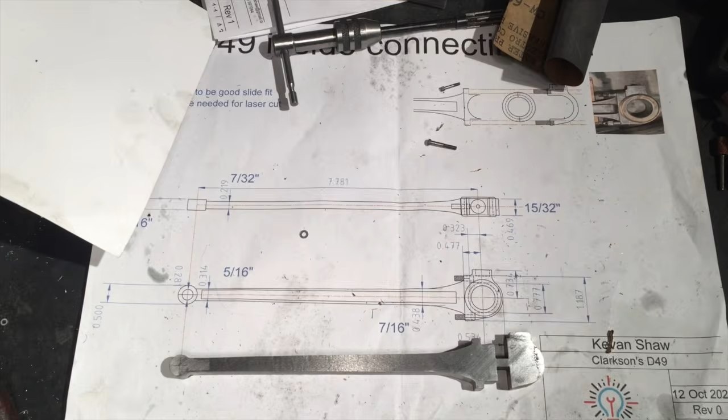Right, so clean this thing up on the belt linisher and with the Dremel to get rid of all the laser marks.

It's come up a lot easier than the other rods did. So yeah.

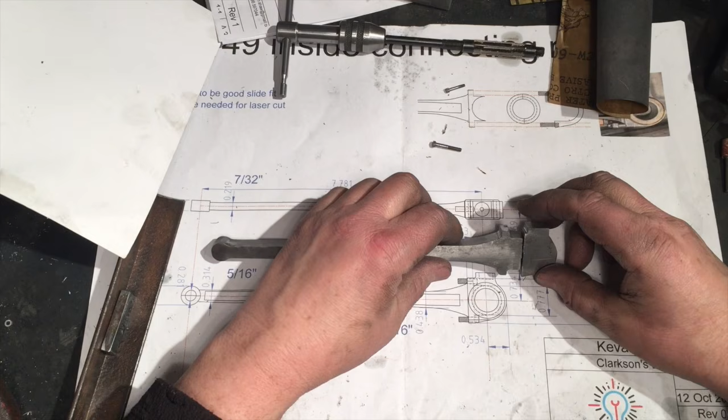Next job is to cut these two pieces apart and start to mark this up so I can plug that back onto there. Now we have some tactical challenges for how we're going to work on this. I think the first job will be to square this thing up, cut these so they're clean and square both ways, and then face that.

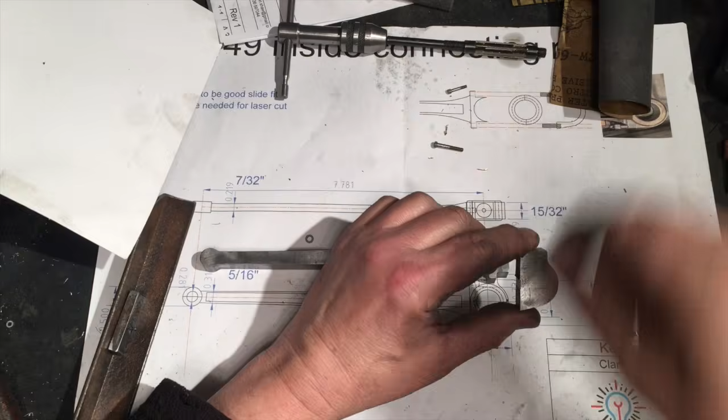And once we've got there, we can start to mark up how we need to cut this. Again, we're going to have to be holding it that way up and cutting that way, in order to get the slot to fit here.

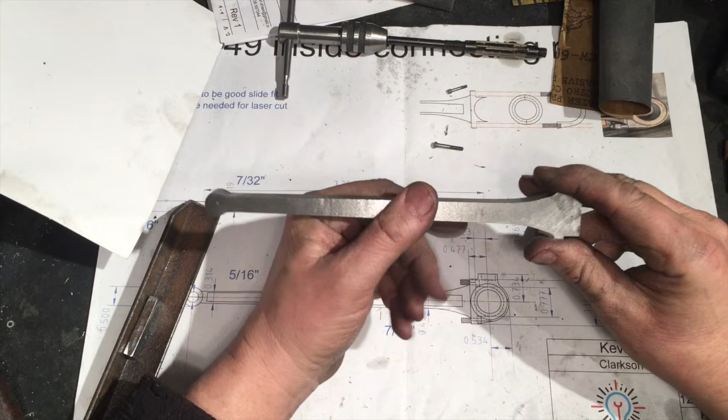So I think we're going to have a lot of alignment challenges here. To cut this one in the vise means clamping on those two sides, and that means you don't have a reference in that plane really, because that's a sloping surface.

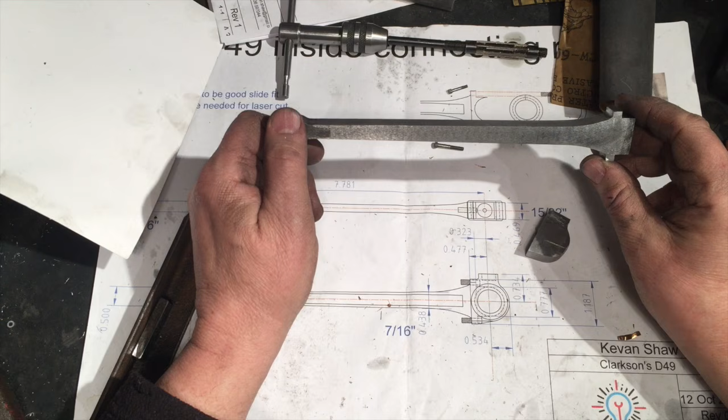I think it's necessary to mark this up and mark the center line, and as we did with the other rods, use the center line and visually line that up on the vise, because there's no physical option there to do that. So lay this over the drawing and see how close we are.

Pretty close. Those curves should match exactly. They don't quite here due to laser cutting and a bit of fettling. There's quite a lot of fettling there. I think I might work that curve a little bit better because it's got a little bit of a lump in it. Yeah, you can just see there.

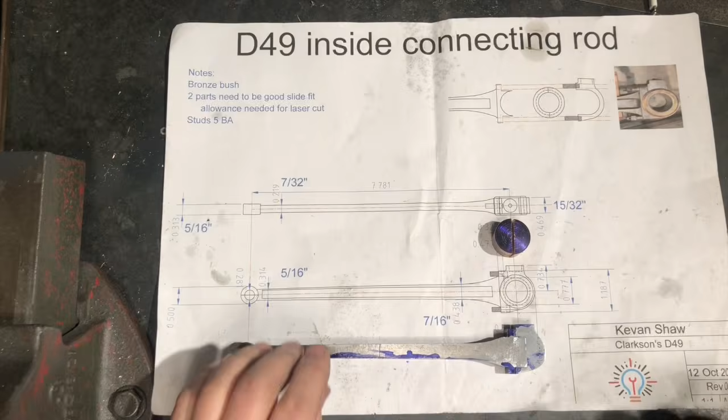Dremel time again. Well, I've done some work on this conrod. I've made these two pieces fit together. I like that.

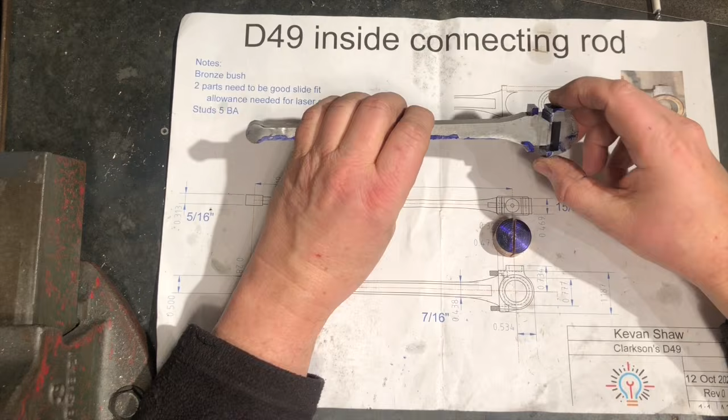That was done on the mill, and it was done by essentially matching the two parts up as much as measuring. Basically, I kept taking small cuts and then checking them for fit, and they are pretty close fit just now.

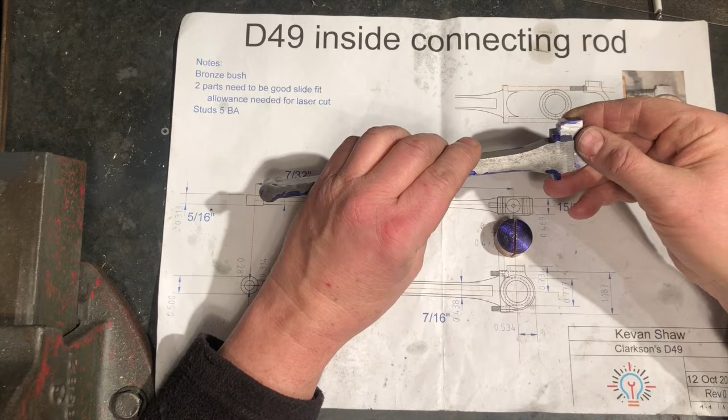There we go. So the next challenge we have is fixing these bits together. So I've marked up centers for drilling.

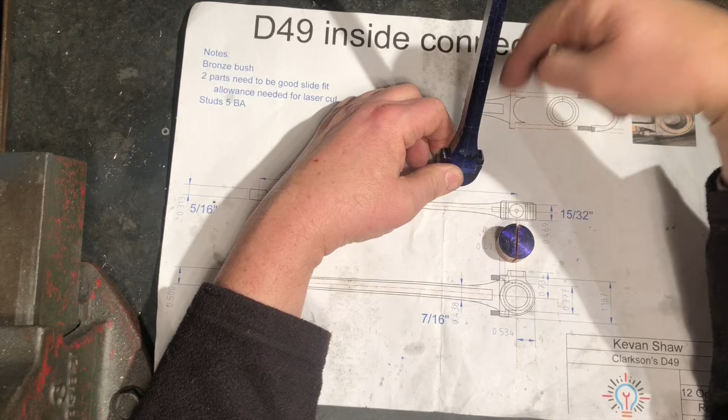Drilling in this way isn't practical. We haven't got anything that's going to get past here. So what I'm going to have to do is set this up that way up. I've drilled down from the top into this bit, and once that's done, use that to mark out the faces on this, put that in the vise and drill that downwards and tap it.

You could ask quite why I'm doing all this, because this part is buried deep inside the engine, and once it's in and the boiler is on, it's never going to be seen again. But I just like the idea of doing it correctly.

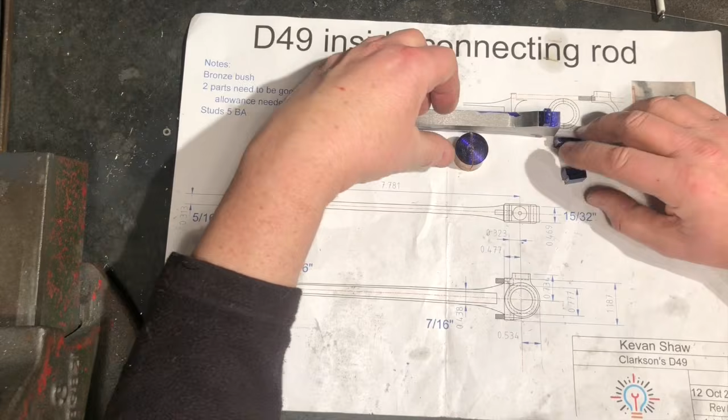I mean, one concern, or the major concern I have about this part, is we have a very small area there to put a thread in, which is going to have to hold this together.

Need to go over to the mill now and figure out how we're going to mount that thing vertically in order to be able to drill these two points. This is a starting point.

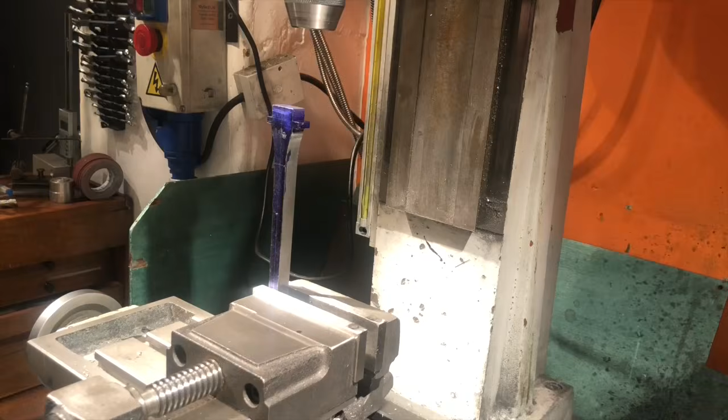The rod is as far down as it can go. The mill head is as high as it can go. All we need to do now is try and make sure this is dead plumb vertical.

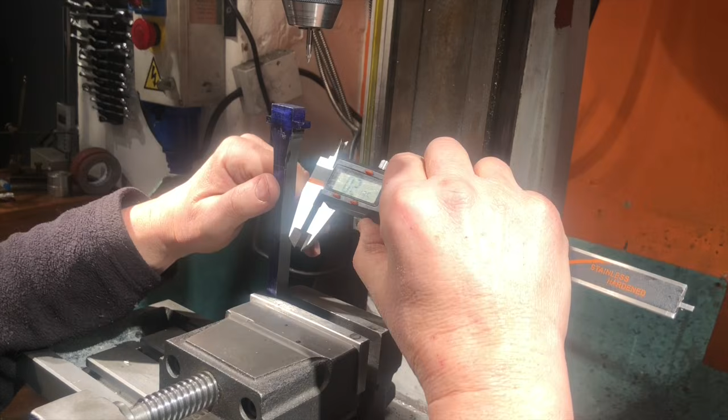Okay, so we should now be set square over the edge of the piece. All that has worked out correctly. We need to go in half the depth. That's 2185, so that's 0.109.

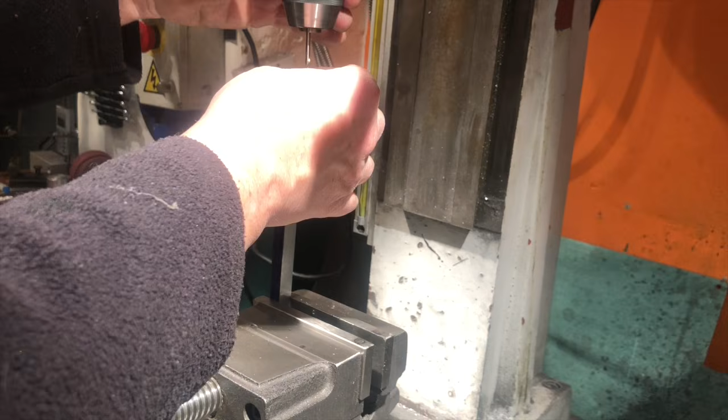Well, that is wobbling like crazy for no reason that I can see. Okay. This is our number 35, 5BA clearance drill. Just a touch of MWF on that. Let's see how this goes.

And we have that as 0 for our X at the moment. So how far do we want to go over there? If we go 11915, that should place us directly above that.

So I've gone to incremental scale so I don't lose my original X, and what I want to do is go back 0.089.

That looks correct. Don't like how that's wobbling around. Okay. Touch the old MWF. Let's see how this goes.

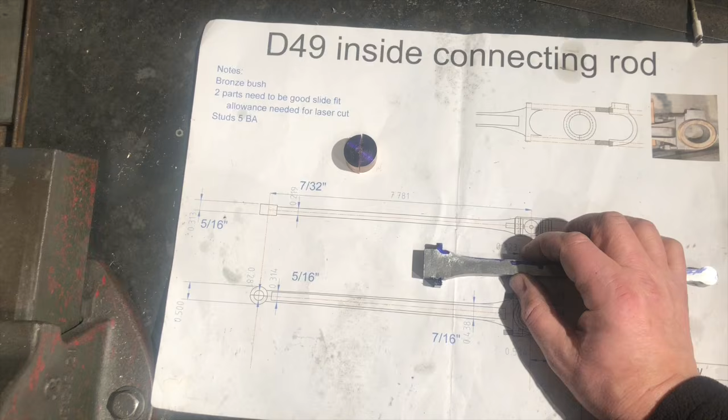Gone through. Right. Okay, back to the bench. So we now have 2 holes through there. We need to translate those onto this piece very accurately.

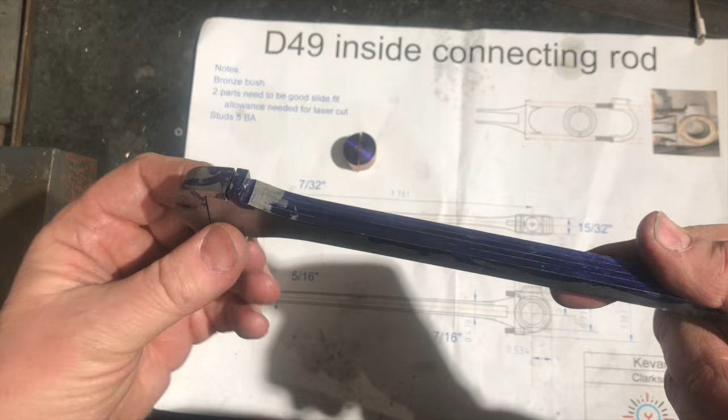I feel like there's a gunge in there somewhere. Let's clean this out. The question is, can I get the pin vise down the side of the hole? Just.

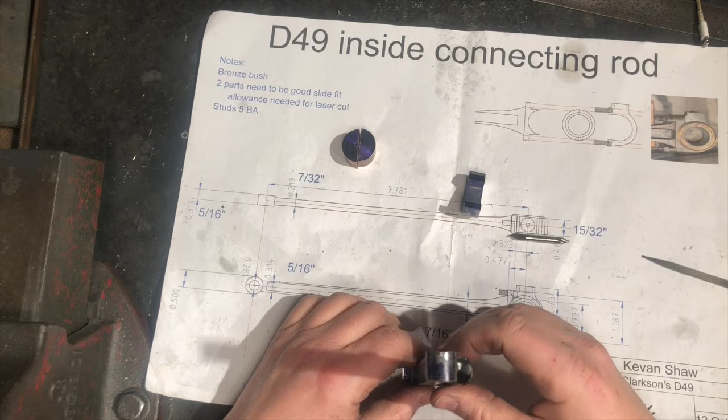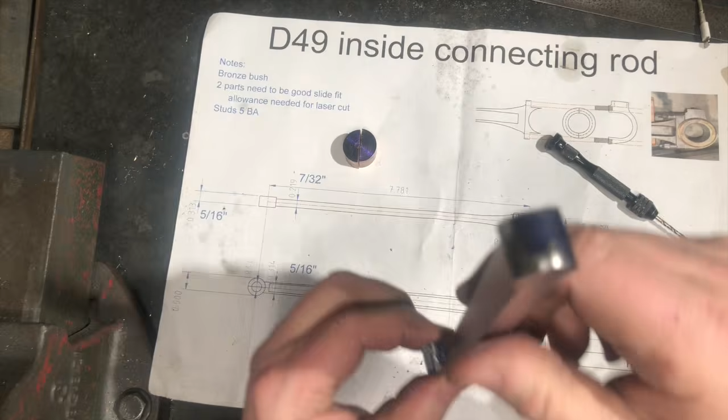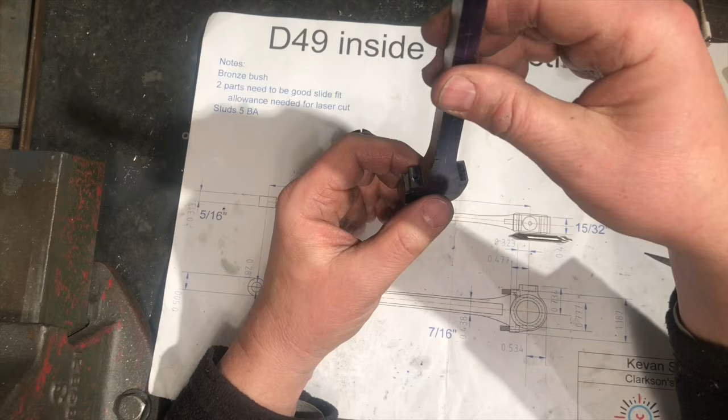Two perfect marks. So what we're going to do now is put this back in the vise, and we'll set up the vertical on that line. That will make sure that the holes are concentric and vertically correct.

Now, this one is going to be very, very close to the edge, if not even break through there. If it starts to break through, the drill's going to try to move that way. So I need to be doing very carefully with that one. That one's got more solid ground to land in, so I'm less bothered about that.

And we've got the gauge on the side here, so zero that there, approximately 0.125 inch.

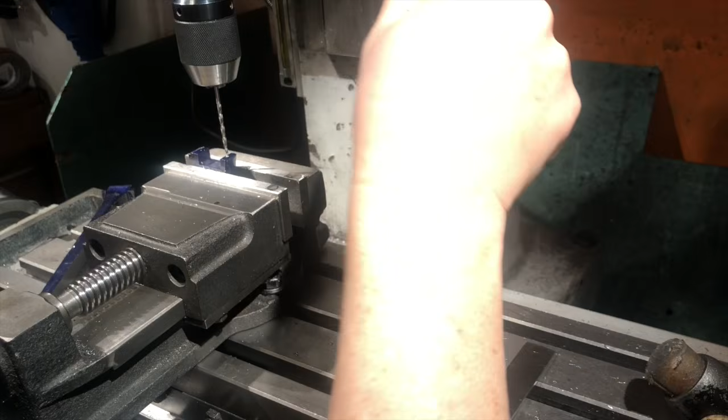Okay, so this comes out, center drill goes back in.

Right, while we're still set up, let's set up for tapping. Okay, that's good.

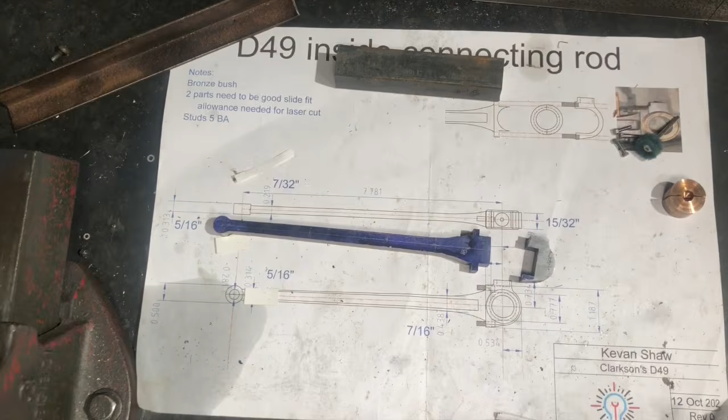So, I think I've called this series by the right name, How Not to Build a Locomotive. The challenge from the outset was this part here. I was always a bit concerned about the lack of thread depth. This is actually scaled exactly from Morayshire, and I think we've reached a position where...

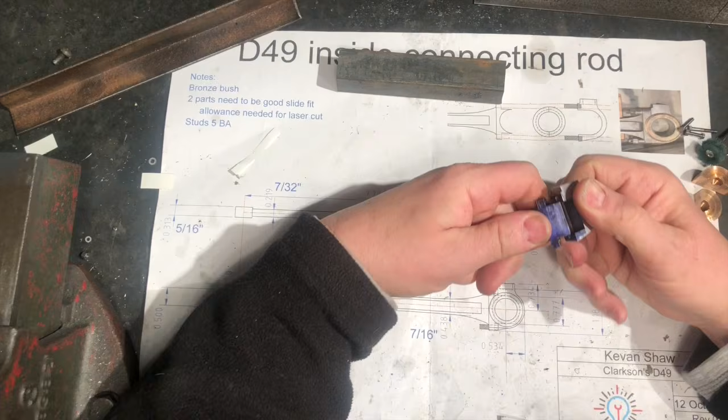It's not a directly scalable part to make it functional. The conclusion is that, well, I took a couple of goes at this. The conclusion basically is that part doesn't work. So what I'm going to do now is to take this lump of mild steel, square it up, and make another part here. Not quite the same shape.

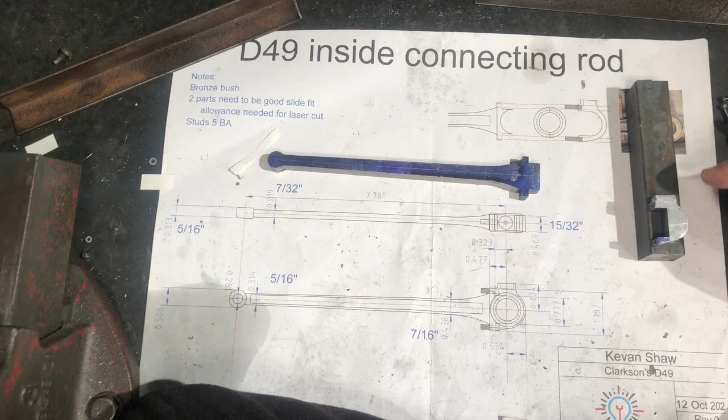I'm going to leave it square to the ends just now until I get the threads in. And once I've got the threads in, we'll see about shaping it, but I suspect we're going to take a different curve to it. We can't be 100% to scale, even at this quite large scale, because laws of physics and materials that we work with don't always scale all the time.

So the first thing to do with this is to cut a section off it and then square the bar on the mill. Once I've got it squared, I'll cut it to dimensions.

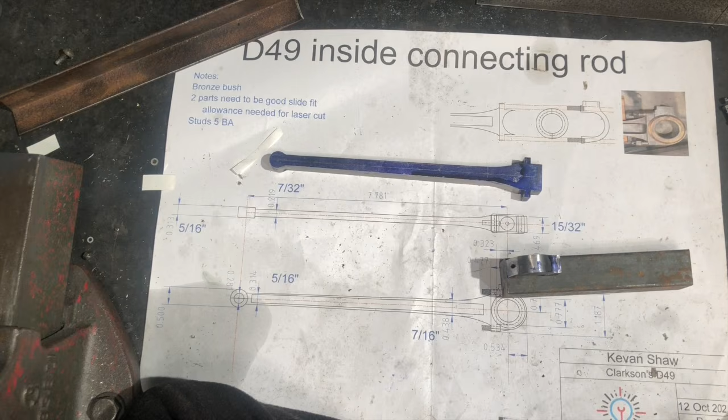Quite a lot to go away. I don't really want to mill all that off, so once I've got it square, I'll probably mark this up and take bandsaw to it to cut it down into something more reasonable. Let's get on with it.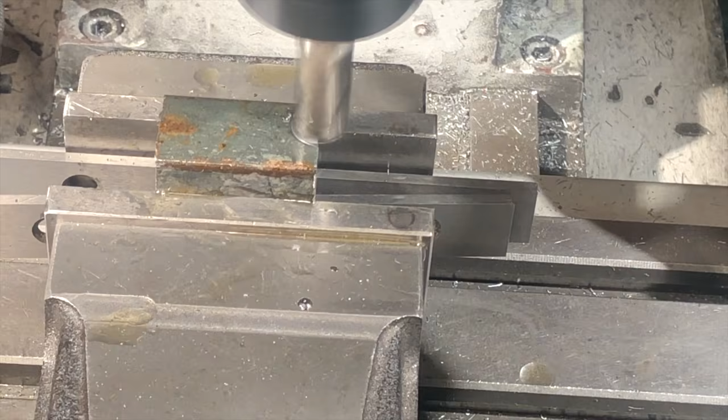Bit of a burr on that side. Let's have a go at getting rid of that. It's going to end up getting cut away anyway on the bandsaw in a second. So let's just clean this up and go from there.

Okay, so now with bandsaw cut it very square. I'm going to get it back in the vise on parallels and hack away until we get down to the flat, and then we'll measure it to get finished depth.

So let's get this out and mark it up as to what we want to do with it. So let's see where we are in principle. So we've got that line, that line.

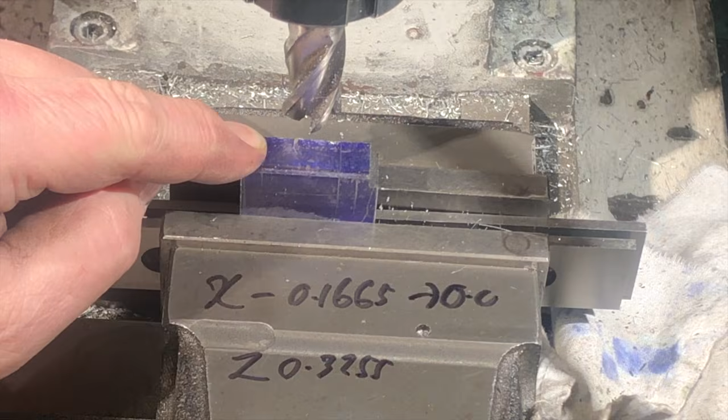What we want to do is take the rod, offer it up, and start marking out where we need to make this hole. Okay, doing by the numbers, that's what we should have. X is now at 0, which is on that line, so it should be minus 0.1665 on that line. Z is currently zeroed on top of the part. We need to go down 0.3255.

So let's give it a go. What I'm going to do is take about 10 thou cut and see how that fits with the part we're trying to match.

So it's a touch narrow, but actually not. I think that's right. Okay, so let's start chunking away between those numbers and see where we end up. Take 15 thou just now.

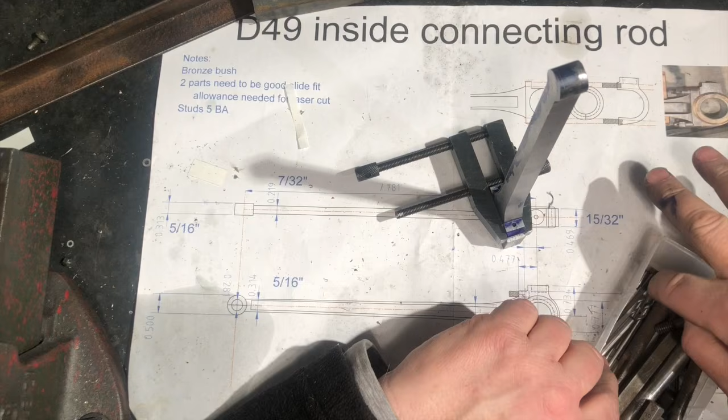I'm currently looking through my bits of broken hardened metal to find something that's a good bit for that hole. They're pretty close. Maybe what I do is try and work with this one. So what I want to do is grind it down so that it's a good fit in there and put a point on it.

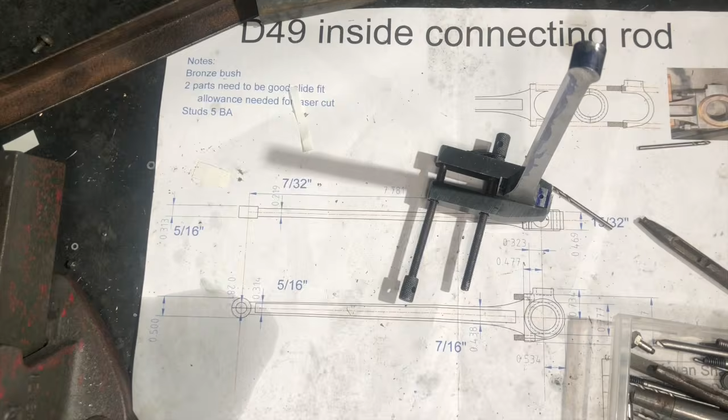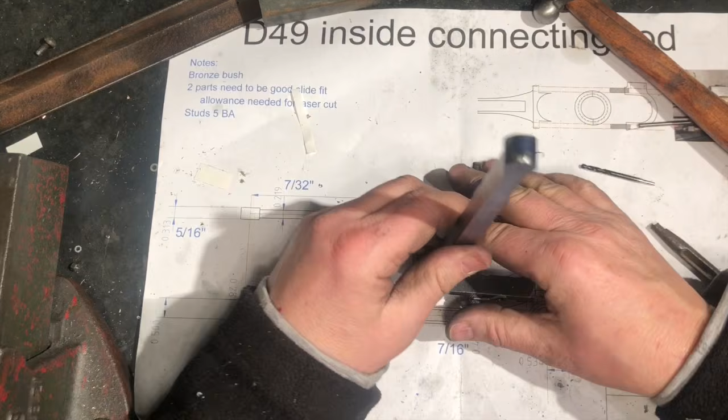Okay, let's see if I can make a mark or not. Okay, let's see to depth.

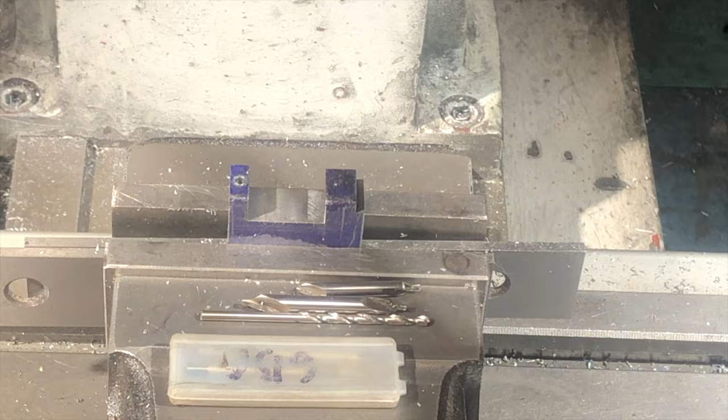So I've got 6 BA taps and my preferred tap wrench, which has a 6 BA plug tap in it, which we don't want yet - a taper tap. Another thing we don't want to happen is broken taps in here.

Get rid of the bar, and try 6 BA through it, make sure it feels comfortable and goes all the way in. That feels good. So the Y should be the same, which we have zeroed.

The first thing to do will be to use a center drill. Looks spot on. 3/32 tapping drill.

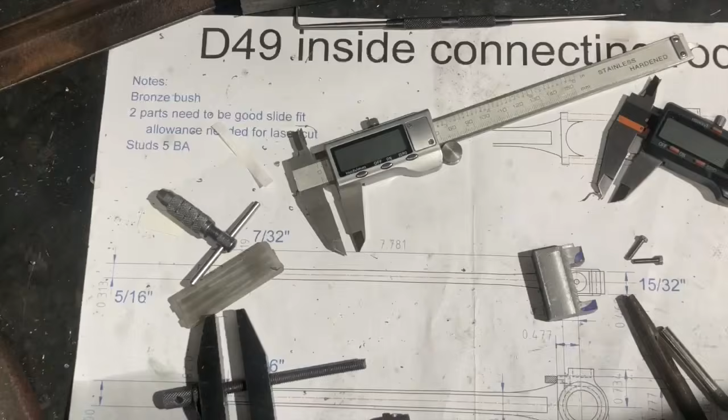Right, that felt a bit strange. I felt a little bit grabby from time to time, which is not ideal. Right, moment of truth - will this now go together? Well, the holes line up.

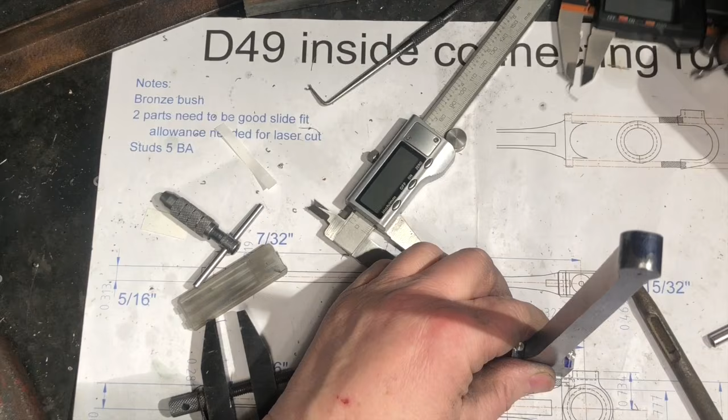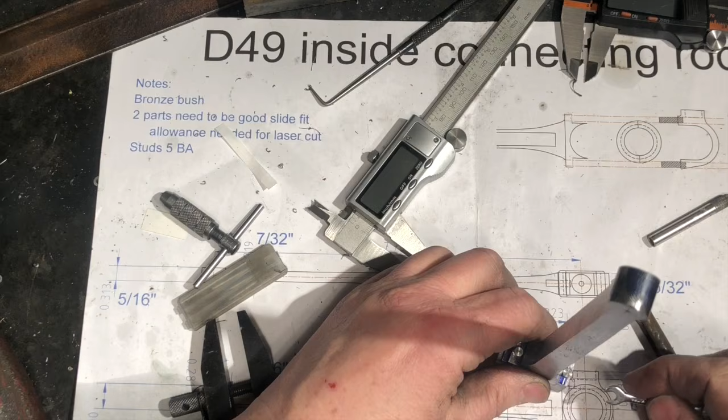We might be doing that. It's tight. That's tight. Success!

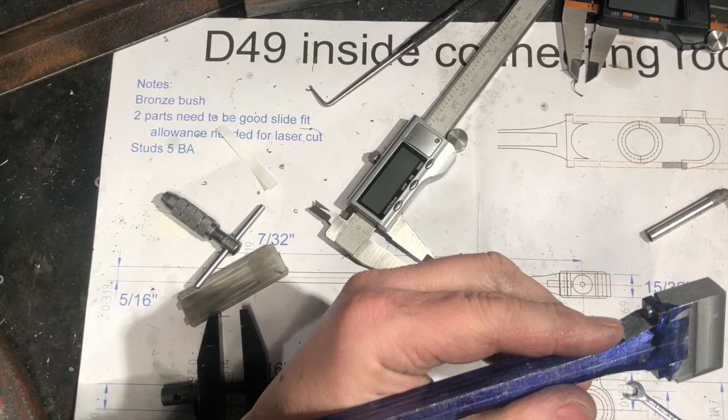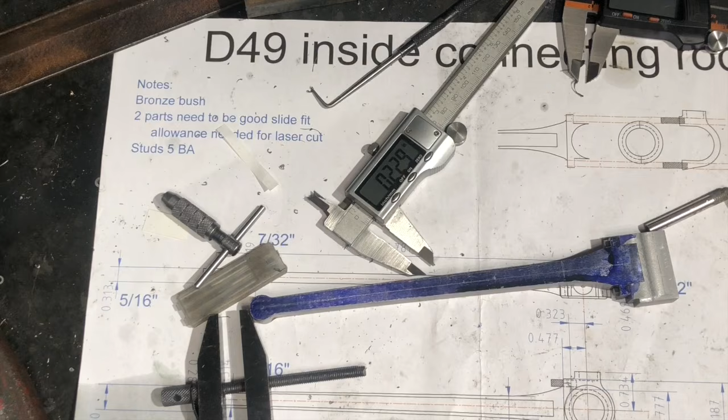So the next problems we have are drilling holes, big holes. This one needs to be for this, so as per the drawing, the diameter of the actual hole is 0.777. Now I guess what we're going to do with that is drill it out to 1/2 inch and use the boring head to get it out to the final dimensions.

We may have to solder this together and turn it into that bit. I put a dimension on this because the centre of that hole is here. What happens when I drill this? I don't know until it's done.

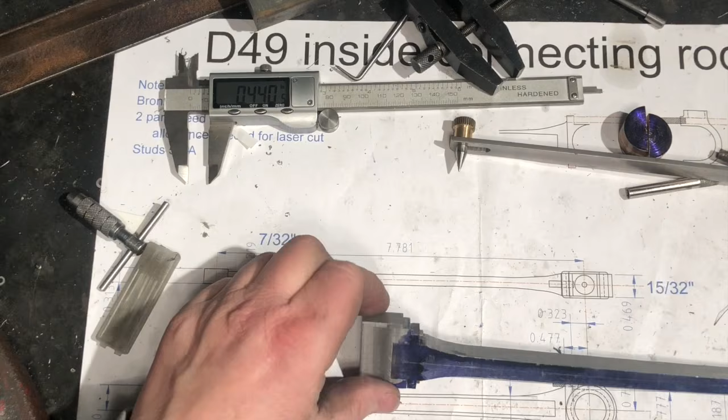Happy with that morning's work because we've achieved something that we were struggling with. But it would be nice to round these off and finish that oil box to dimension. But before I do any of that nicety, I want to get this hole drilled in case it screws up - I'd have to make this again.

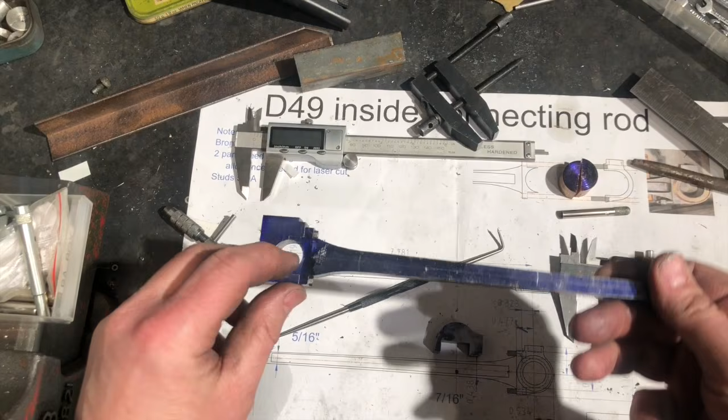Okay, so that's the holes drilled. I've drilled this one out to 5/8 at the moment, and that one is 1/4 inch, which is what it needs to be. Now the next challenge is fitting it to our jig.

So before, that was centered on the big hole and that was centered on the little hole. Because this one is a slightly different length, if we center this one on the little hole, we miss the big hole by a bit. I'm just wondering whether we should make some different spacers for this, or just try using a 1/2 inch spacer and see how that fixes on.

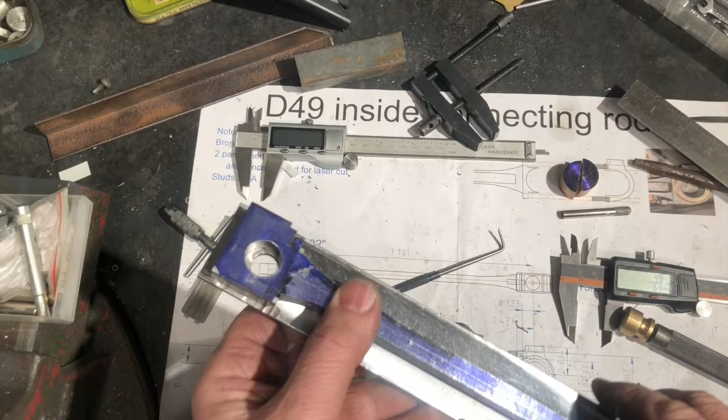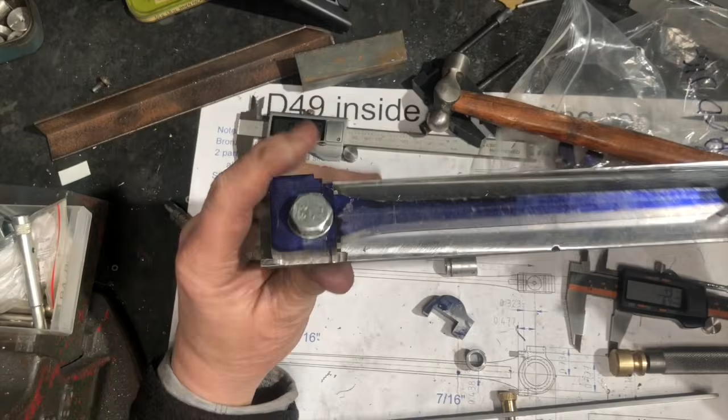So before I put this on the mill, I'm going to just try these things on the bench and see how we go. Right, so that is bolted down hard with the 1/2 inch spacer in, and nothing seems to be wanting to go anywhere. Let's tighten this one down as far as we can get it.

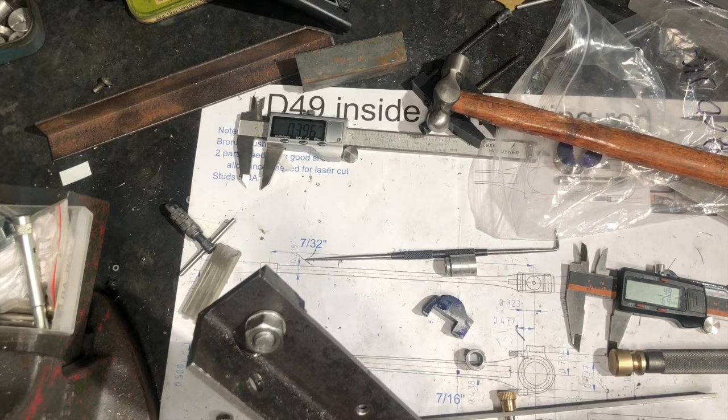So, next task is to start carving out this lot. Challenge again is going to be how we actually do that bit at the end. That's a much shallower taper out. I've done the setup a bit differently this time.

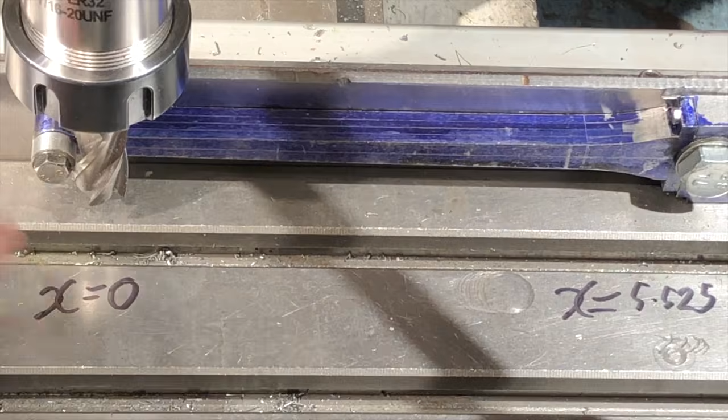First off, I've set the thing up in the back slot rather than the middle slot. That was so that I have more room at the ends.

I'm going to bash my knuckles off the toolbox as I wind the X out. I've set up the X's by eye as best I can, and I think I need to take about 85 thou off of each of these sides.

So what I'm going to do is start cutting some fairly light cuts, probably 15 thou at a time, and let's see how we go. Lots more noisy milling.

Well, I would say there's about 20 thou still to go there, but where's the guessing stick? It says 25.5 thou. Take 2 cuts, 10 each way, I think. So.

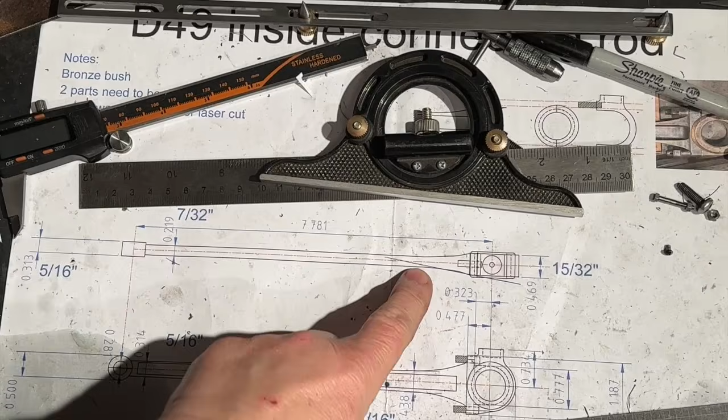What I've done is I've drawn the angle on the drawing between the starting point of this and the end of the arc. And I've used this contraption to try and set that against the centre line that I've got drawn, and visually taking that line with shadows showing it nicely. Quite accurate.

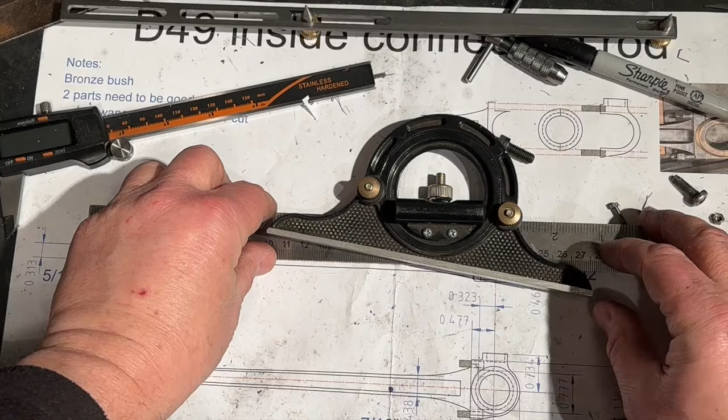Okay, so if we lock that off, what we're going to do is transfer that angle over to the mill and figure a way to fix the jig to this angle, and hopefully we can make a straight cut by doing that.

Okay, I tried doing it by the numbers and that didn't quite work, so what I have done is I adjusted it by touching off the cutter here and here to get the point where I've got a good reasonable surface, which is going to have to get curved either by draw filing or on the linisher.

So what I can do now is invert the rod, leave everything else exactly as it is, and I should be able to achieve the same cut on the other side, on that inside face, without having to change any of the settings or any of the DRO settings.

That's it, bolted back down. You'll understand the rod looks like it's bowing a bit, but that shouldn't really affect this end very much.

Okay, what I'm going to do is put a clamp on there, finish this end, where I should be. Go up to 60, take it cut along and see what we've got.

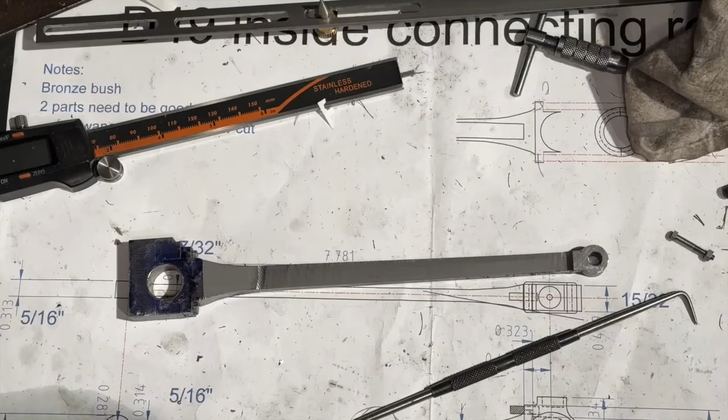Not exactly symmetrical, but as good as we're going to get. So let's take this off and have a look at it. Okay, so that's the finished rod as it is.

Definitely in need of some linishing. Lots of machining marks that side. Lots of machining marks there.

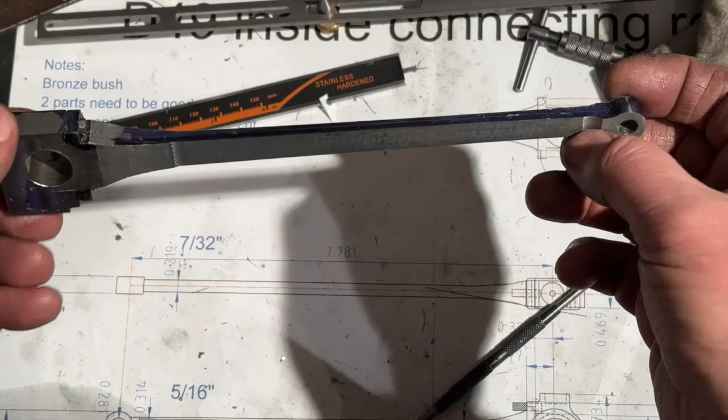That's it. Yeah, that needs a good rubbing down. Okay, and then we've got to figure out how we're going to finish this. At the moment, it's functionally correct. It needs an oil hole in the top.

You could probably do with this trimming down and potentially a bit of a curve putting on there. It's not going to be matching the original drawing by quite a long way, but as we discovered, trying to do things to the drawing to scale just didn't work.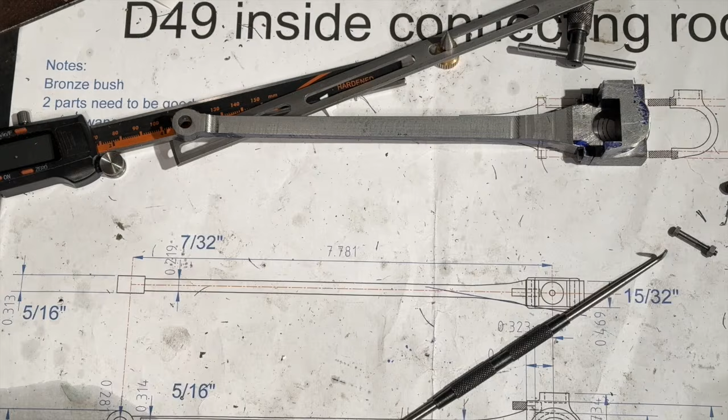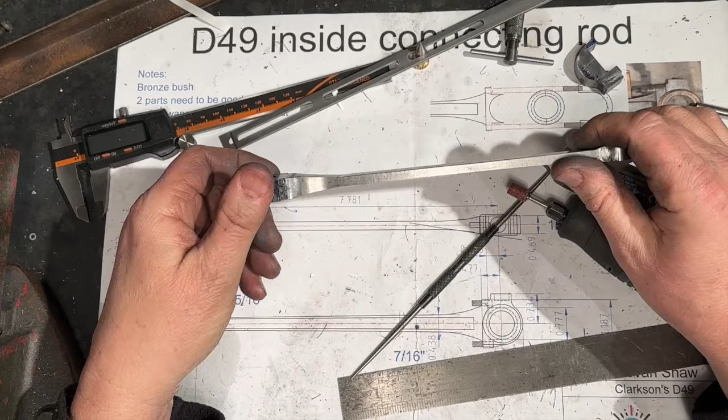Okay, linishing time. So that's the job cleaned up on the linisher. Pretty much all the burrs are gone. That's not quite perfect yet. I'll give this another run. It's a bit better.

Still slight signs of machining marks there. I'm going to take the Dremel and the little drum to the corners that I haven't managed to get into and see how that works out.

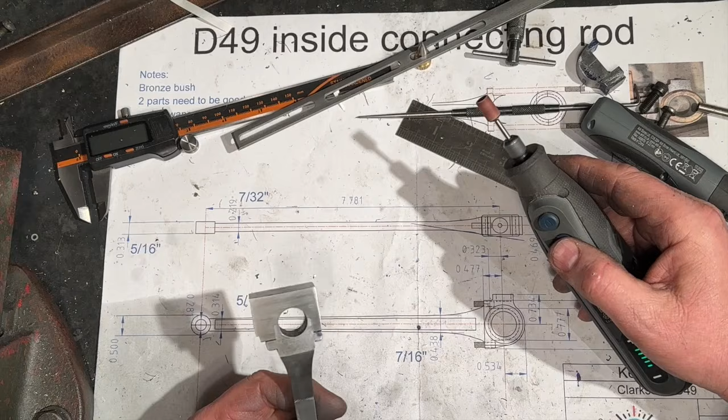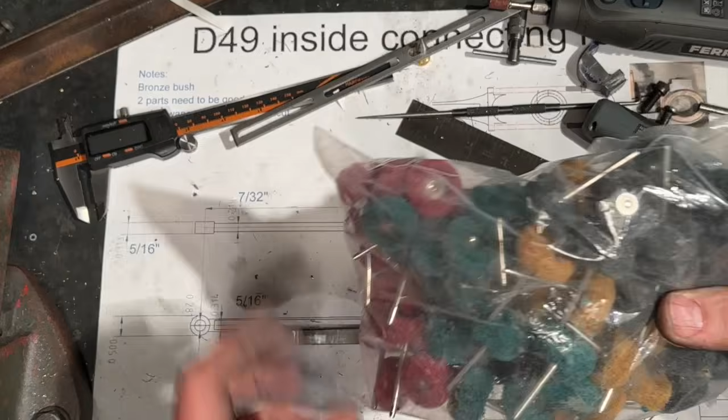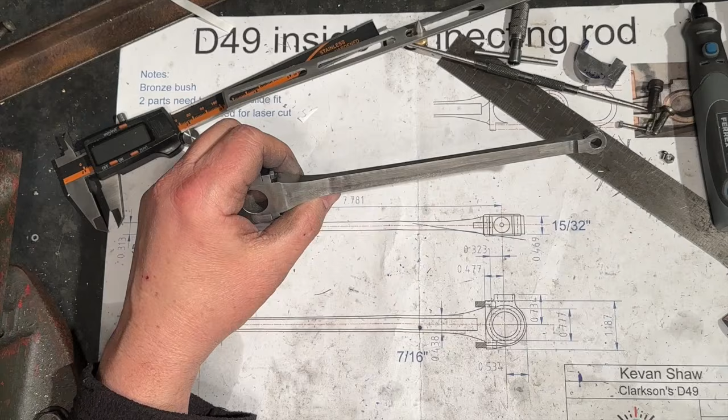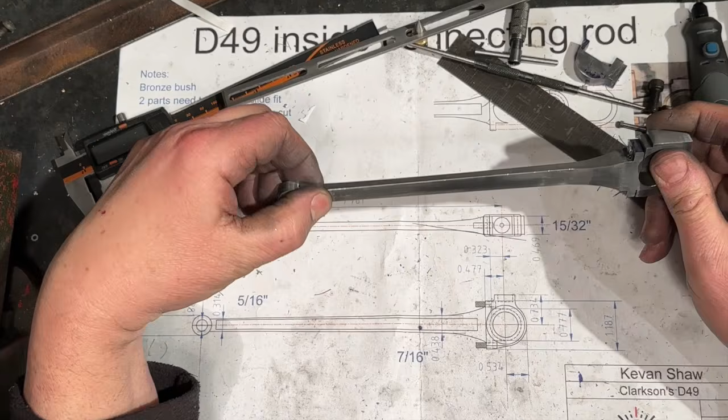And I think there's a risk, as it's probably one of the most stressed components on the engine, of taking too much metal out of this. I'm pretty happy with this. Straightness is pretty good. So what are we doing with this thing?

Let's put some blue on this and we'll have a little look-see. So here's some genuine old-fashioned equipment to do this with.

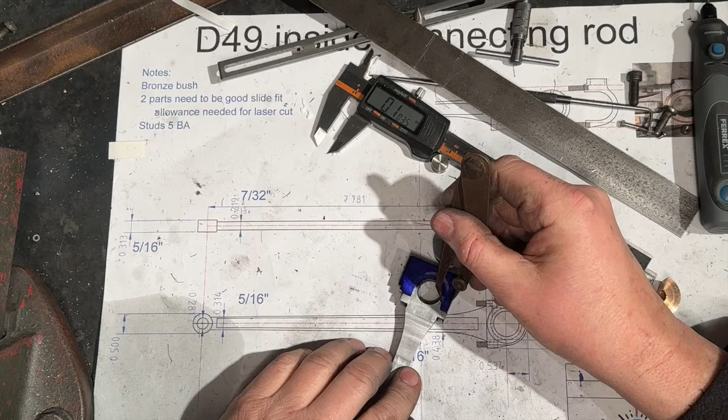So if I just set this here and follow that round, takes us right back to there.

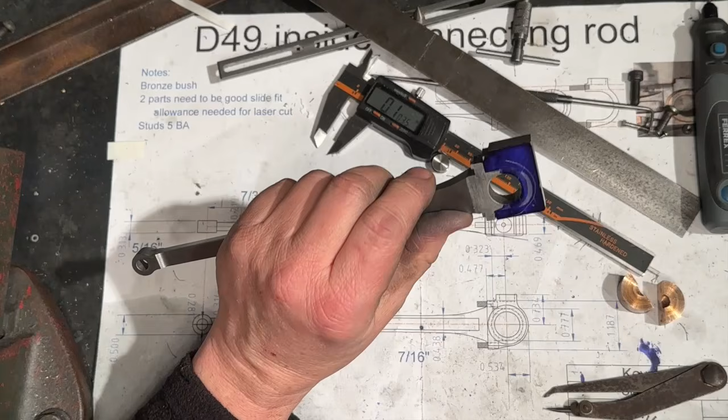I think I need to go further out than that because this is the problem down this corner. Let's set this to the side edge of the block. Do the same again.

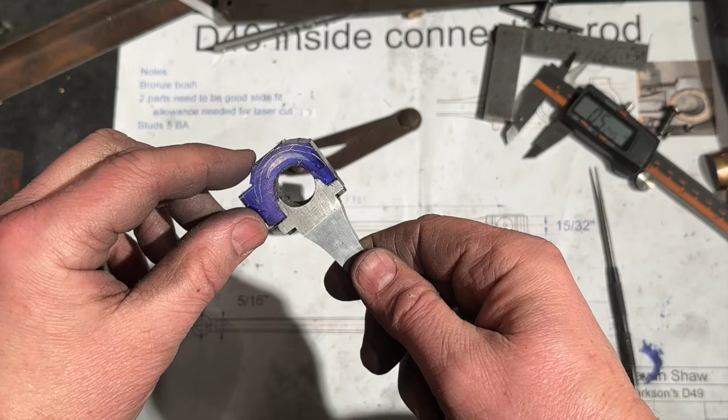That looks more reasonable. Okay, we'll take the mess out of this on the bandsaw and then see where we are. Okay, roughly to shape. A bit more to be taken off there, that needs to be cut flat.

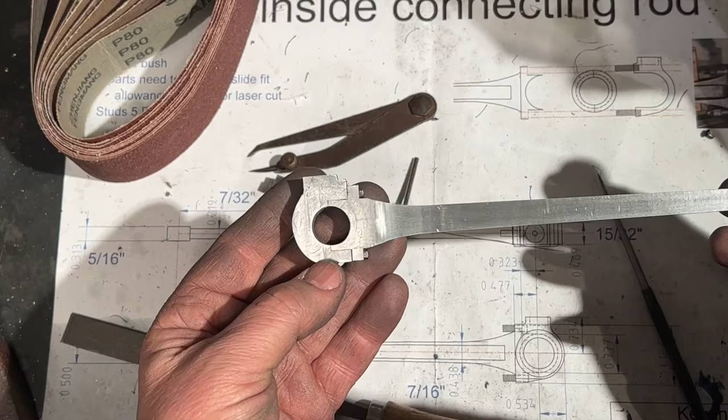So I've now rounded that off on the linisher to the line, so it's not a machined surface, but I think that is a good solution for getting things rounded neatly enough. I mean, the proportions aren't quite right because it's much bulkier than the prototype, but in the scale we need the mass, I think. So operations still to do.

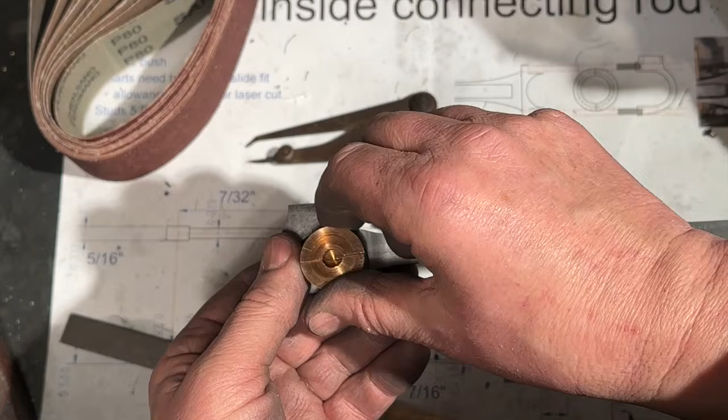This, both ends need boring out and bushing. I have the bushing material here for that end. I had hoped to get onto bushing during this video, but unfortunately not.

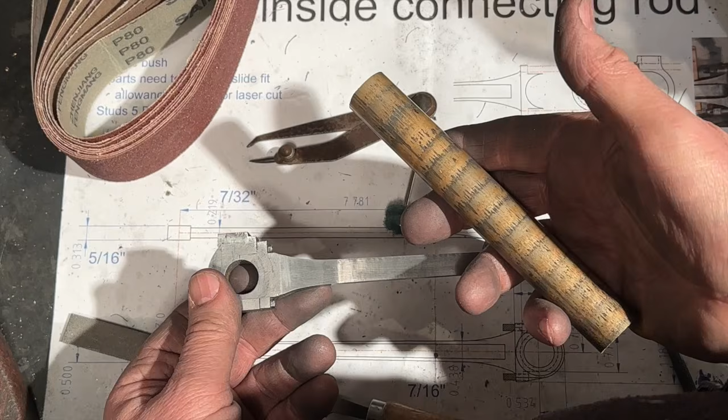The bronze for the coupling rods just turned up today. Well, it's actually gunmetal rather than bronze because by all accounts it's going to be easier to machine. I've never played with this before. The bronze I've got is phos bronze and it's really hard and really difficult to work with. So let's hope that's going to be easier.

We can see the difference, colour difference. I mean, it looks very brassy. Once we get it on the lathe, then we'll see how this cuts and see if it's better. So let's keep that for another day.

So today I'm declaring this rod finished apart from the bushing and the oil box.